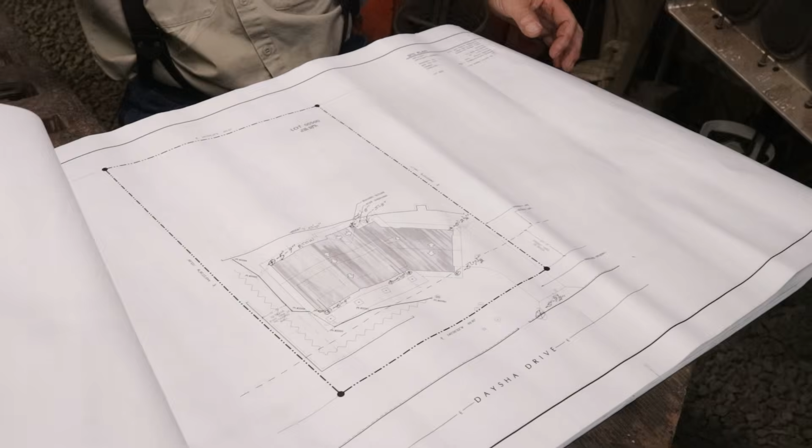But in the meantime, there's a lot more information in here that we're going to unpack right now. For general application, if you're worried about reading a set of plans, think about this. Somewhere near the front is going to be a site plan. The site plan is just that. It's looking from the sky at the property. The corners, the easements, the access, the utility lines, and the location of the structure are specified.

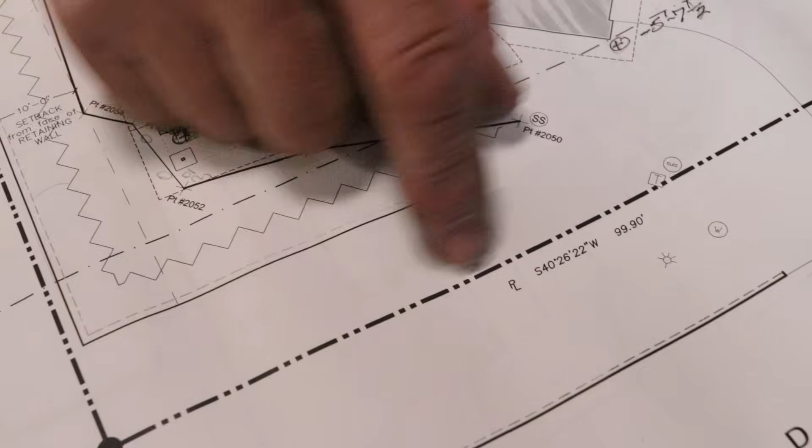Now, there's all kinds of stuff that could be on here. I mean, there's headings and bearings and lengths of property lines that may or may not be interesting. Setbacks, you better pay attention to that. That was very complex on this build. That point right there was a hill to die on.

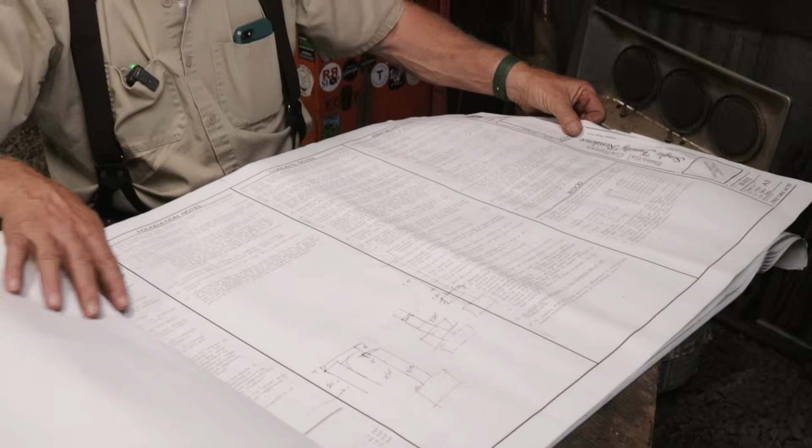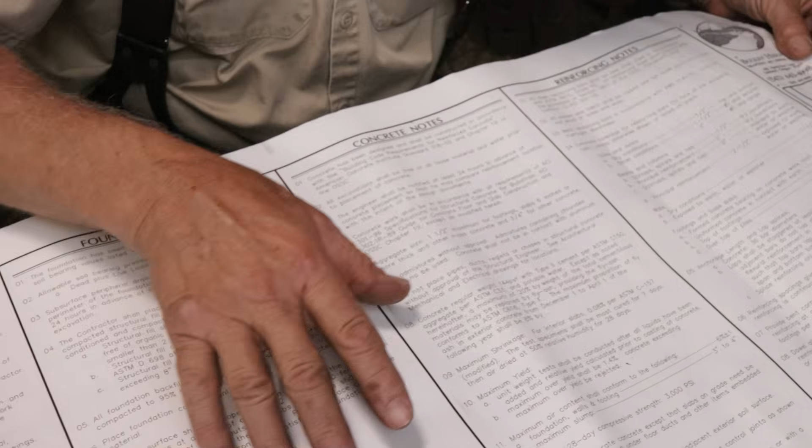Once you get that nailed down, or maybe it doesn't even concern you because somebody else already did the surveying, then you can turn the page and get into some foundation notes, concrete notes, general notes that are going to reference the codes and the specifications that everything is predicated on. Maybe you don't need that on the first day, but you're going to need it eventually.

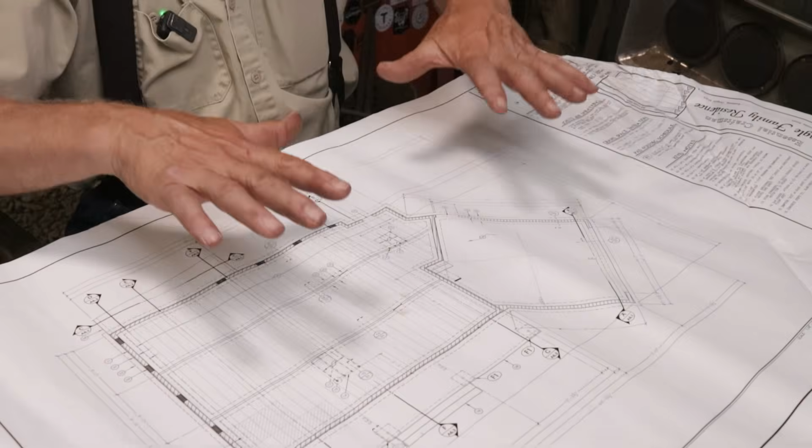A foundation plan is a funny looking thing because they have to represent the joists and the plywood sheeting and the outside lines on the footings and the actual lines and locations of the stem walls or the slab on grade. And so you think of the foundation drawings in layers. You're looking through some of the work to see some of the work beneath, but you got to pay attention to all of it.

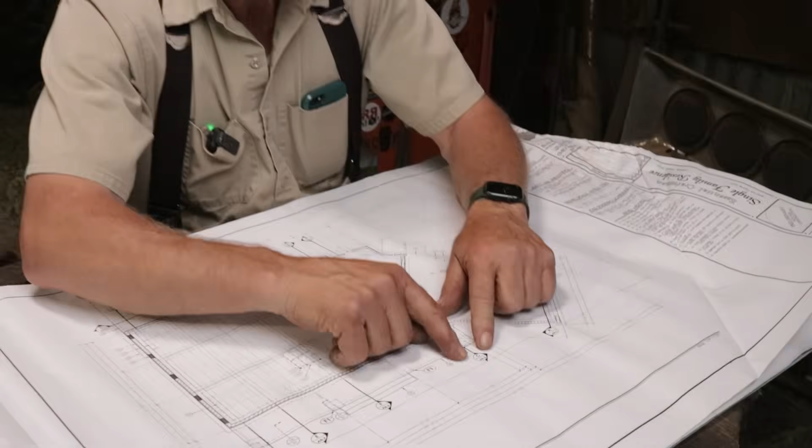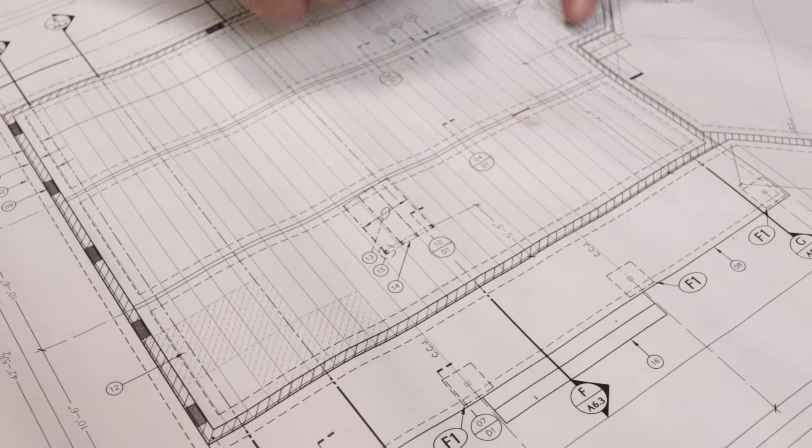And then when you have specific questions about, yeah, but what is that wall made of, and how wide is that footing, and how much rebar, this is a detail. You see that? This is detail F on page A6.3. So when we turn back to that, which we will do later, you can identify every one of these details on the pages noted underneath the letters noted, and they are usually flagged in the representative or the typical applications, which may occur in different places on the same building.

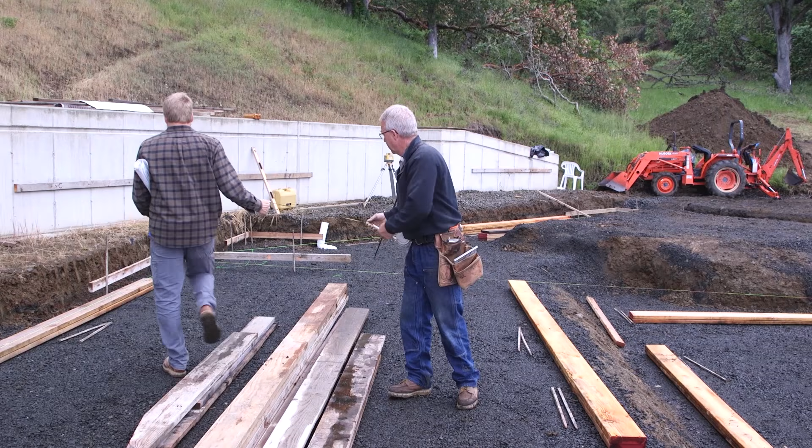Now, when you're looking at a foundation page like this, don't content yourself with looking at the lines that indicate the structure and the dimensions. Check the notes. The keyed notes are going to give you information that can't be specified in here without making it impossible to read. So the notes on the side are working in conjunction with the drawings on the page. One or the other is not enough. Together you get a complete picture and a defensible picture. If the plans say to do it and you do it that way, generally you're safe.

Now, before I move on, and if you're a contractor, you already know this, or you're going to learn it the hard way, but if you're a homeowner, you may not have discovered yet that there is a difference between the plans, even the engineered plans, and the approved plans. So plans can come to us with different levels of confidence.

And you had better not take it to the bank, either metaphorically or for real, before you have something close to an approved set of plans. Let's see what the approved plans say about this foundation page that might put the whole thing in a different light. On this set of approved plans, that note is mine.

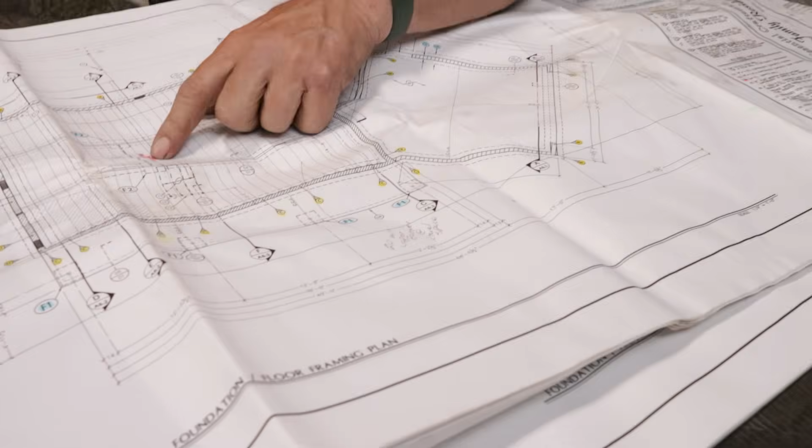These color codings were done during the plan review process, just so that the plan inspector was sure that all of the details off of these schedules, the keyed notes, the hold down schedule, the pad footing schedule, had been accounted for. And all of this happens under the umbrella of the engineer's stamp.

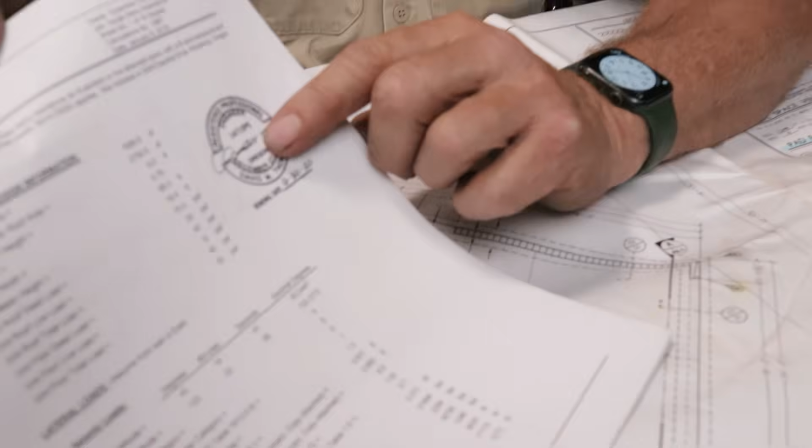Now, in a lot of cases, particularly in a more commercial set of plans, the engineer's stamp will be somewhere like this on every page. But here in Douglas County, Dave Thomas, good friend, good engineer who died of COVID right in the middle of this build, by the way. I miss him. This is an example. These are his supporting calculations that the county used to validate what they were approving on this set of plans.

So, all of that to say that just because it exists on the plans that you are bidding off of does not necessarily mean that it will exist or not exist on the plans that authorize the actual production of the structure. So I don't know where you live, I don't know how complicated the oversight is or isn't, but it's a danger to buy a set of plans off of Etsy.

Because you see it on Pinterest and you like it and you can get it for 10 bucks, you shouldn't assume that you can give it to a contractor and have a happy outcome. Now maybe you can, but it's rolling the dice, let me tell you that. So anyhow, moving forward, foundation plans, if you get your head into it and you go to the sections on the specified pages, you're going to have a ton of information that'll tell you what you've got to do.

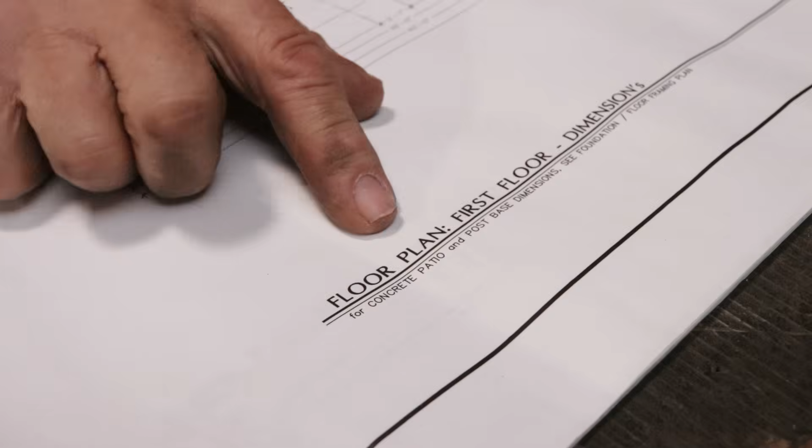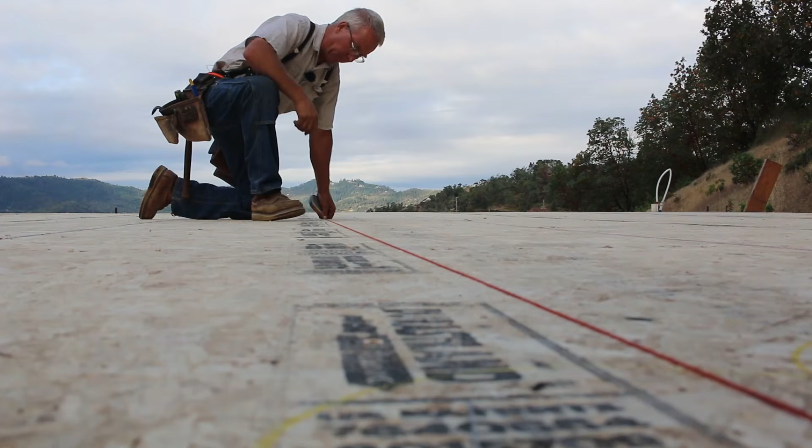Now we come to a plan view. This page is floor plan, first floor, dimensions. This is a simplified rendering of looking down from the sky onto the first floor so that you can actually read the dimensions and there's not a whole bunch of stuff encumbering with beams and structural and shear wall callouts. This is dimensions. This is handy when you're snapping the thing out. You see, there's not a whole bunch of notes.

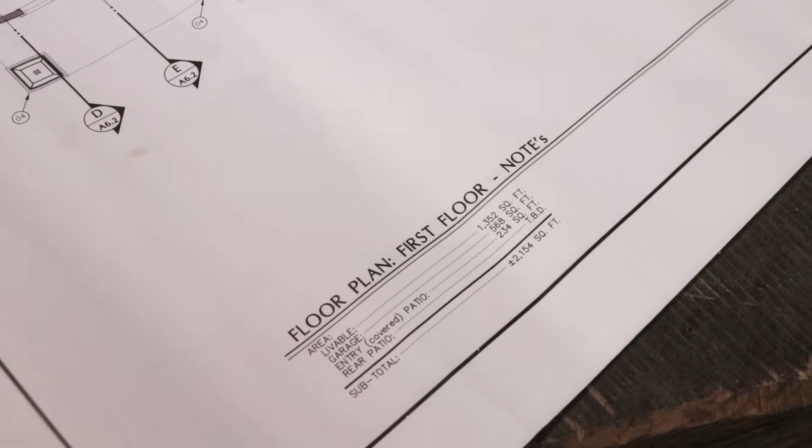It's just the dimensions. But if we turn the page, and yours may be different than this, floor plan, plan view, first floor, notes. There's a whole bunch of information on this page besides the dimensions that you've just got to have. There are door schedules, types of doors. There are window schedules, the dimensions and the type of windows.

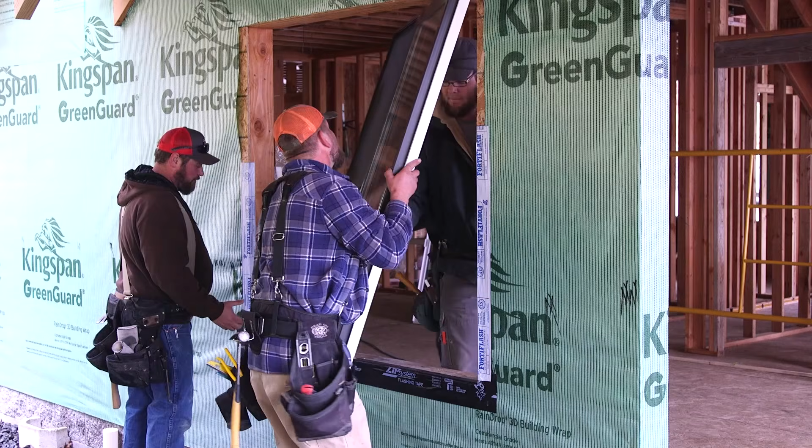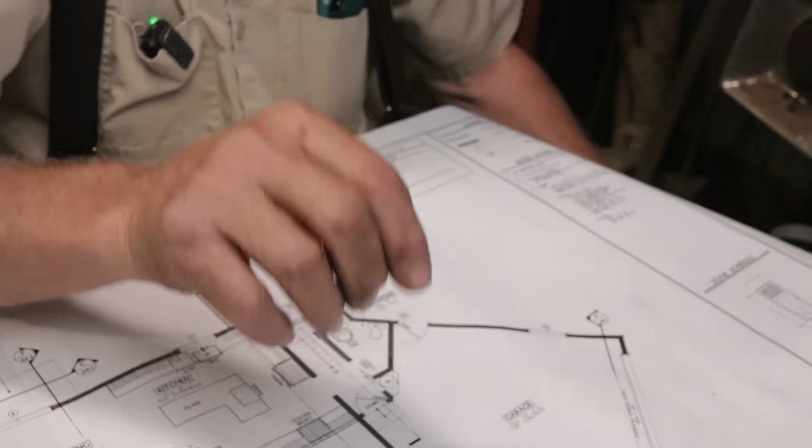Now this doesn't specify the material. We went with a vinyl window. But this set of notes could have applied to any type, whether it was wood casement, aluminum clad, fiberglass, but these are the sizes and the type of operation. So you will see that there are different, although similar, section indicators located in slightly different places, showing different aspects of the details compared to what was on the concrete page.

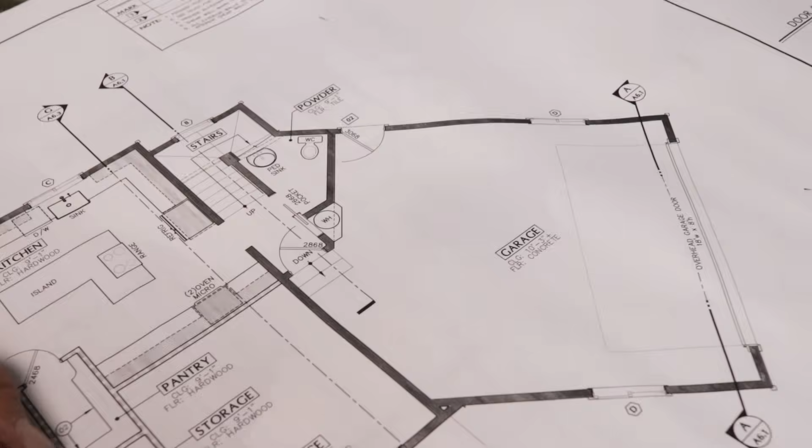These sections are cut clear through the whole building, from the top to the bottom, so you can see the details in each one of these walls. There's just a ton of information in the sections, and we'll get to those in a minute. But here's where you find them. These little arcane symbols, that's how you indicate a door and which way it's swinging. There's a 3068 door, and it is swinging this way. And I will just tell you that that is a left-hand swing.

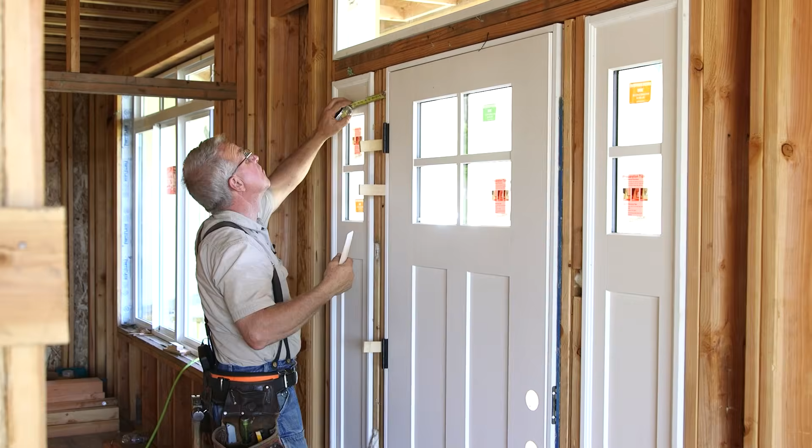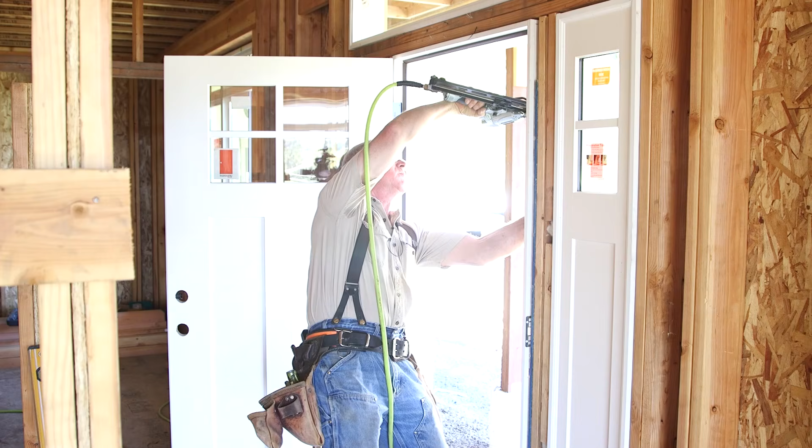Swing of doors around here is determined by this little cliche. Put your butt to the butt, and it'll tell you the handing. Hinges on doors are called butts. They're butt hinges. So if you put your back end against the jamb that has the hinges on it, if it swings this way, it's a left hand. If it swings this way, it's a right hand. You don't need to get complicated with in swing, out swing. It's just butt to butt, right hand, left hand.

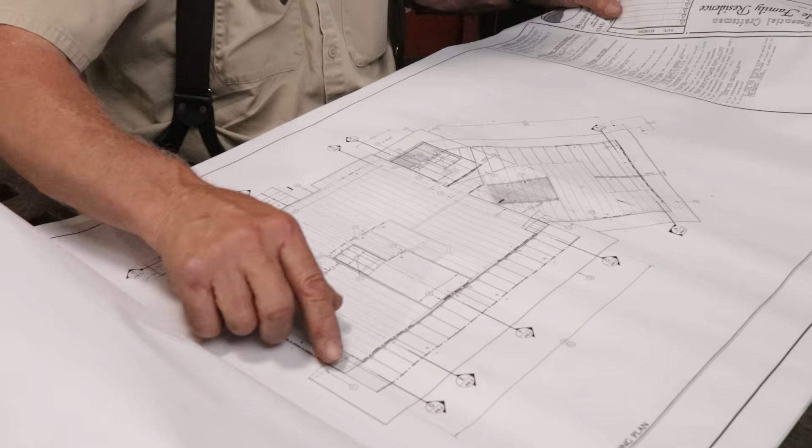So this next page is the same shape, but with way different information. This is showing floor joists that are going on those downstairs walls. You see they are shown underneath with the addition of beams, rafters, hangers, floor sheathing, roof sheathing, ridge beam over the garage showing a gable.

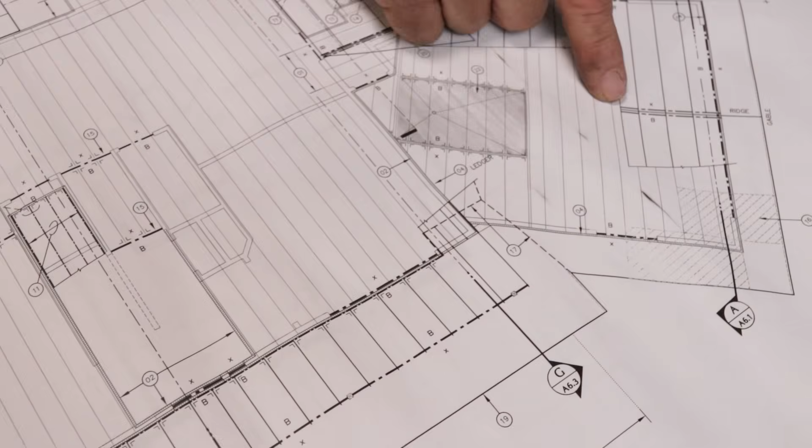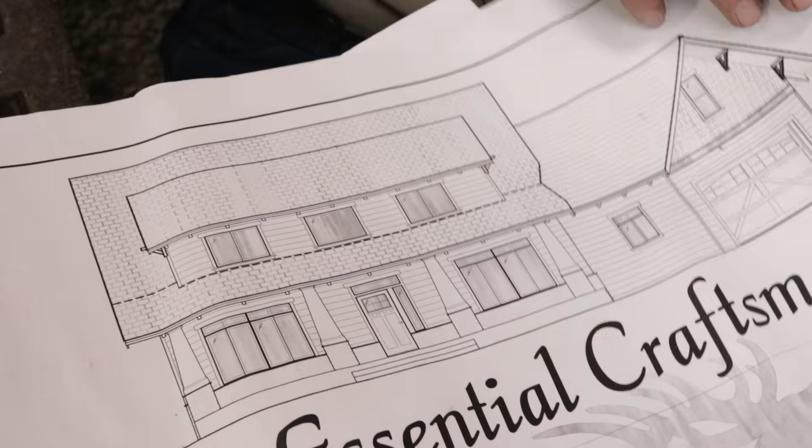So this is a hybrid between floor plan and roof plan that shows where the first floor of the house, let me show you this, where the first floor of the house is covered by porch roof and garage roof. We haven't even talked about the second floor roof or partitions, but we are getting to the intersection between what's on the ground floor and what's up in the air.

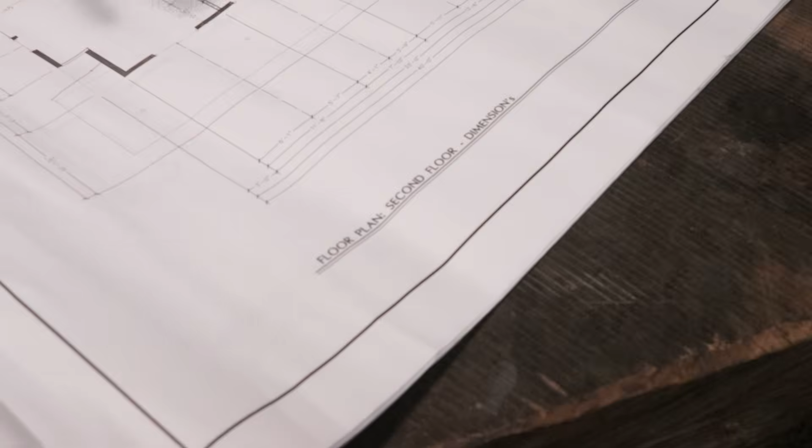There's a ton of structural notes in here that dictate exactly what material has to be ordered, and then you have to figure out when it needs to get there. This becomes radically different. Here we have the floor plan, that is from the top, second floor. This is showing the living space upstairs. The stairs are referenced, and the partitions around the bedrooms, in the area over the garage. Now we've moved up in the world, but this is just floors and walls. The roof was initially addressed on the previous page.

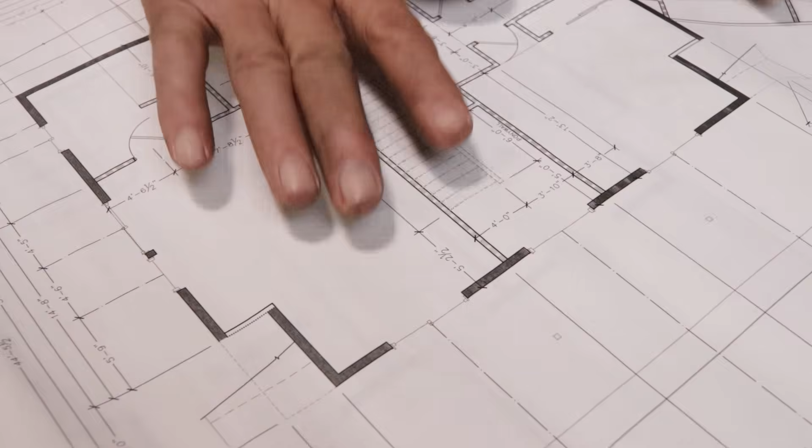The porch roof is not even showing up because now we are getting the dimensions on what happens in the second floor. Now, in the same way that it was just dimensions on the first floor plan, when you first saw the floor plan and the ground floor, dimensions only, same thing here for clarity and ease of reading and getting the dimensions right. This page is just how big it is. That's handy. No notes, but when you turn the page, same thing, only different.

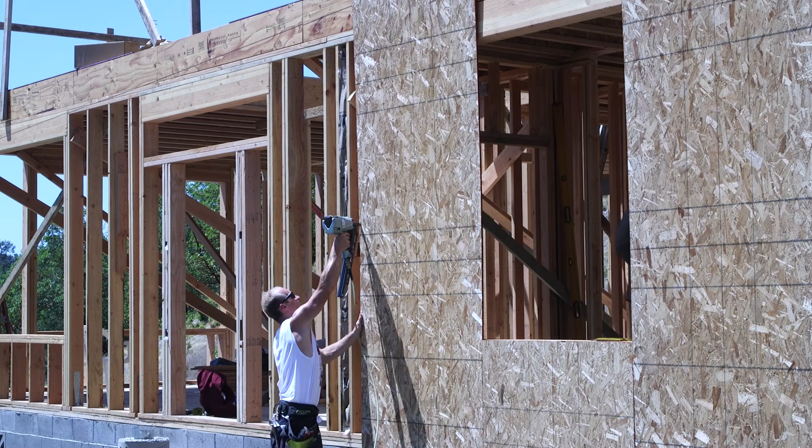Floor plan, second floor, notes pertaining to windows, shear wall schedules, those are important. The shear wall schedule has to be understood because it's not just the material, it's the nailing pattern and the blocking pattern, and you will definitely have rework to do if you don't get that right. But this begins to show the names of the rooms, how the stairs are actually going to work, how the bathrooms and the appliances and the closets and the door sizes, just like in the downstairs, there's a ton of detail that you better pay attention to here, and we haven't even gotten to the roof proper.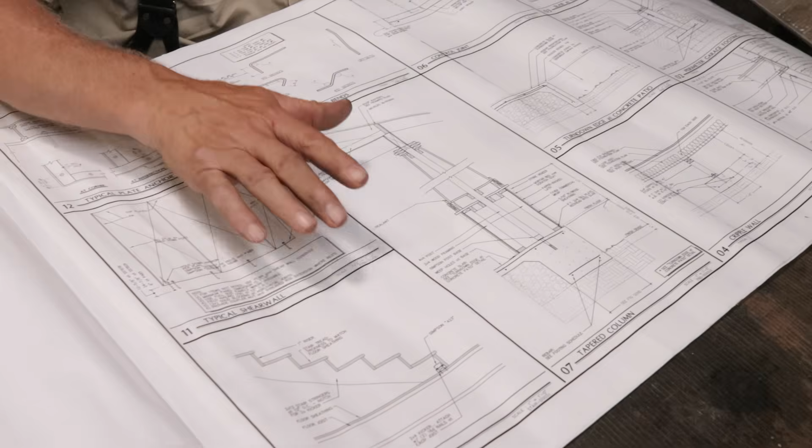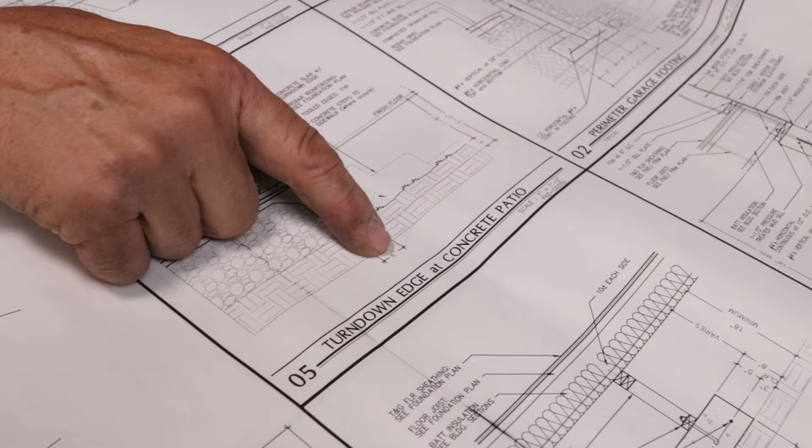This is where the details from those sections begin to show up. The cuts to the building and the details in the foundation plan, those kinds of things begin to show up here. This is detail 2, detail 5, detail 11, and these are all on page D1. So you learn to interpret the references on the previous pages to come back and get all of the information: turn down edge, footing width, rebar specification. There's just a ton of information, including things as detailed as the bends on the rebar, the depth and location of control joints in the slab. You have to absorb this, but not the first time you open the plans.

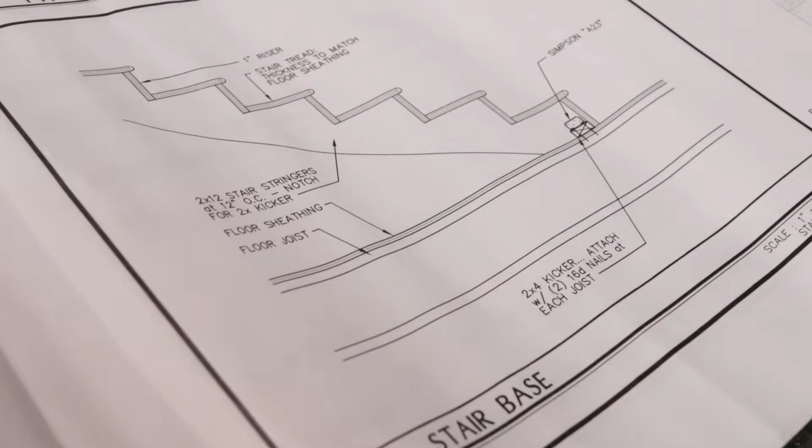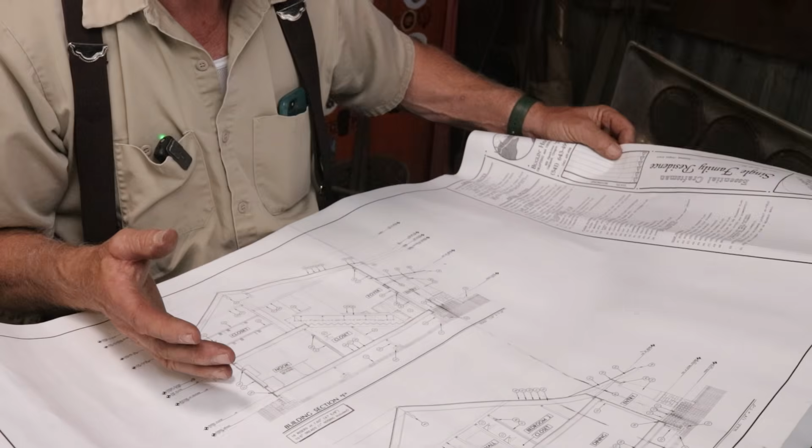Continuing with sections, and these are the large sections through the whole building. So you can look at this, imagine the building was sliced, and then drop back and see individual blown up details that are referenced on these sections back where we were just looking. It takes practice, it takes time, and it takes patience. There are things you do not want to shortcut unless you're ready to get out your wallet. So a picture is worth 1,000 words, right? And a picture as detailed as these are worth tens of thousands of words.

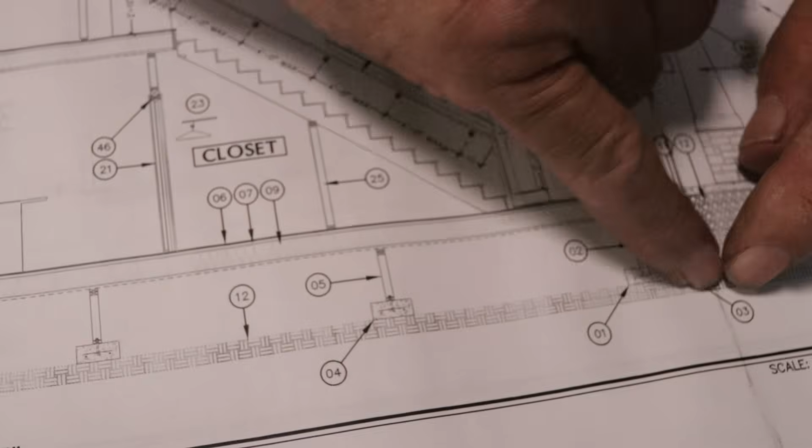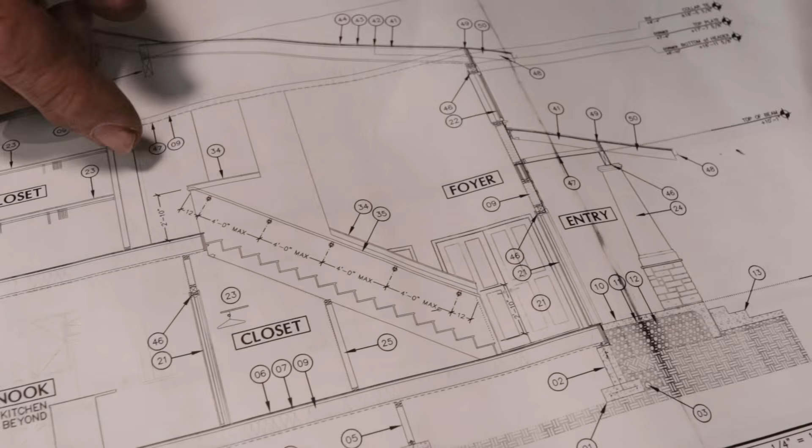I mean, there's information on here. Type of granular fill is included back in the details and the notes and the sections. Drainage is specified, width of footings is specified back in these other places. You can come in here and get the information about how close together you put your standards or brackets on your stairway. All of the relative elevations are specified with this, each grade established so that you can measure off and figure your stud heights right off of this if they're not specified elsewhere. I don't know how you would ever describe in prose, clearly, in an actionable way, the information that is contained in sections and blueprints.

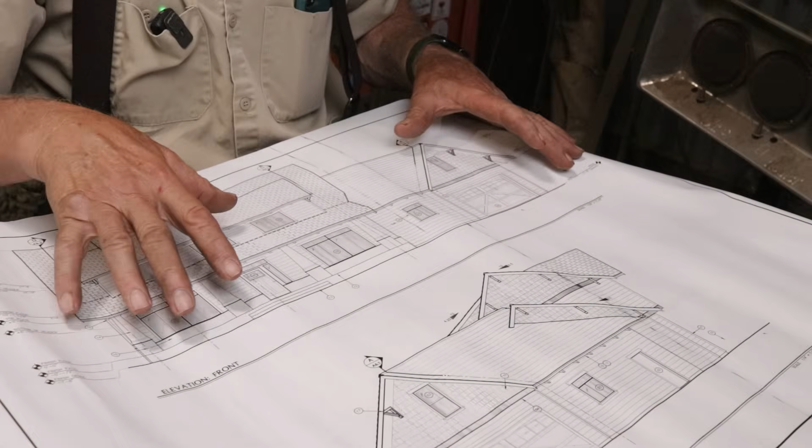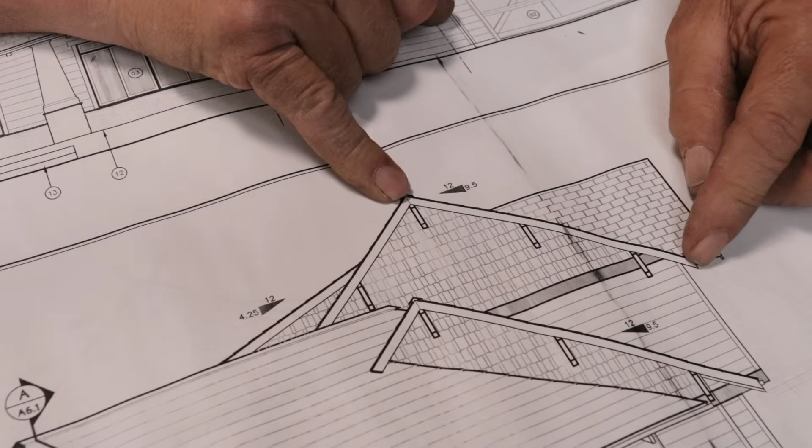And then we get to elevations. They complement all of the other drawings and give us a way to visualize in 3 dimensions what everything prior has just been representing in 2 dimensions. This is how it begins to emerge off the page. So for instance, the elevations that are referenced on the previous page can be understood at these various points, and you can begin to get a grasp of what you're up against. The aesthetic considerations begin to manifest. Gee, maybe I want a garage door that looks like that. Here's what those corbels are going to look like, and if they're not specified, you at least have a target to shoot for when you make your patterns.

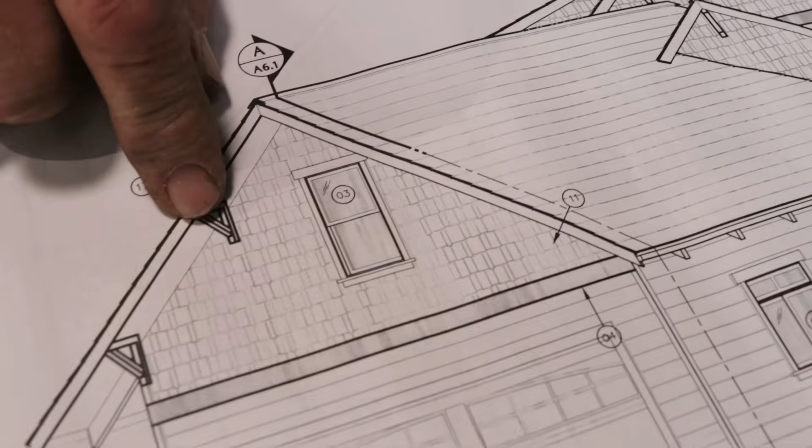Elevations relative to siding, where you make transitions, where garage door headers happen, continuous vented roof lines. I guess the takeaway is, it is a foreign language, but you don't have to be fluent in order to keep track of a conversation. You just have to be careful, you have to be patient, you have to have an attention to detail, because if you are not focused on understanding everything that's represented here, you're going to have some difficult conversations.

But start in. You can draw them. If you just look at a set of plans for a while and understand how you show a door swing and how you draw wall proportions and how scale works, you can sketch something out on the back of a napkin and sit down in the coffee shop and have a conversation with somebody about what your ideas are. When the rubber meets the road, buddy, you better have some idea of how to read a set of blueprints.